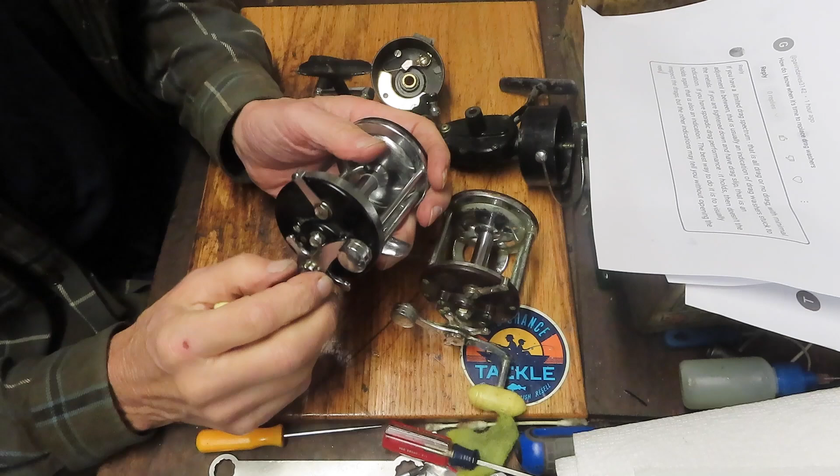The first comment I have is, well, is your drag slipping? If you're tied all the way down on your drag adjuster, whether it's the star adjuster or the drag tension knob up above, and you can still turn the spool, that means you don't have enough contact or pressure holding those drag washers firm. If they're not holding firm, you're going to have that slip. That's the first indication.

The second indication is a bit more interesting, and usually involves a reel that hasn't been serviced in quite some time. What happens is the grease that was put onto the drag washers - and there's a whole stack of them, metal and fabric washers inside the drag stack - dries out and bonds the washers to each other. That dried grease basically becomes an adhesive, bonding the two.

That freezes the whole drag stack. So instead of having drags that slip against each other on a cam-like basis, you have a single stack welded together. You'll have full drag if you tighten it all the way down, or free spool immediately, but there's no variation in the drag adjustment whatsoever. That tells you it's time to at least service the drags, and probably replace them if they've bonded together in the metals - they've likely become pitted, worn, and compressed.

So first is all drag and no drag, and of course if you've tightened your star adjuster or drag knob down tight, that's also an indication. Well, how do you also know?

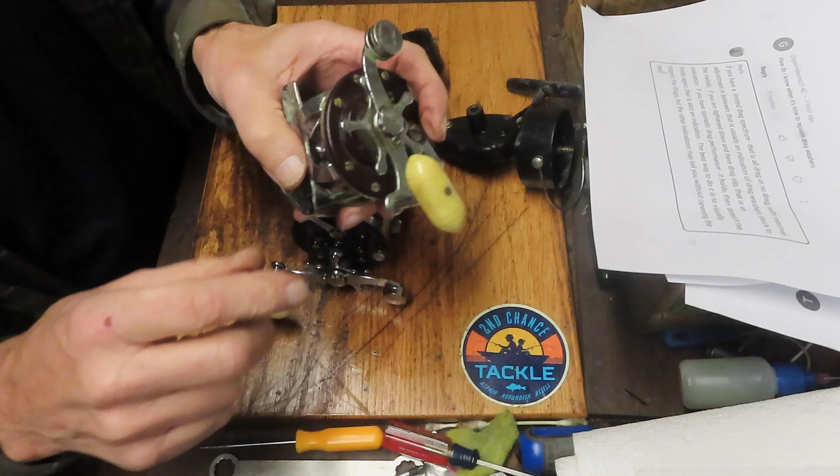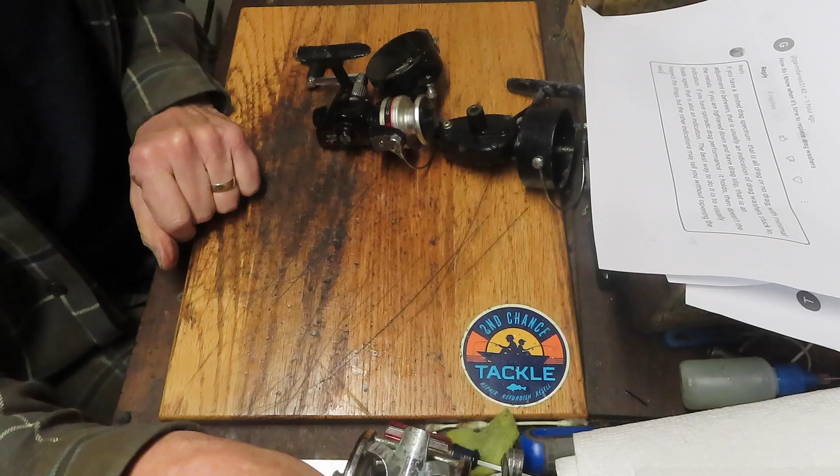If you have a reel, like this other Penn reel here, where that gap is pretty much gone, it's an indication that there's wear. So on a Penn reel particularly, if there's no gap here or a limited gap, that's telling you that you need new drag washers. So, a couple of different indications: all drag or no drag, drag slip, or the inability to have a drag when it's fully tightened down - all are signs you need to replace your drags.

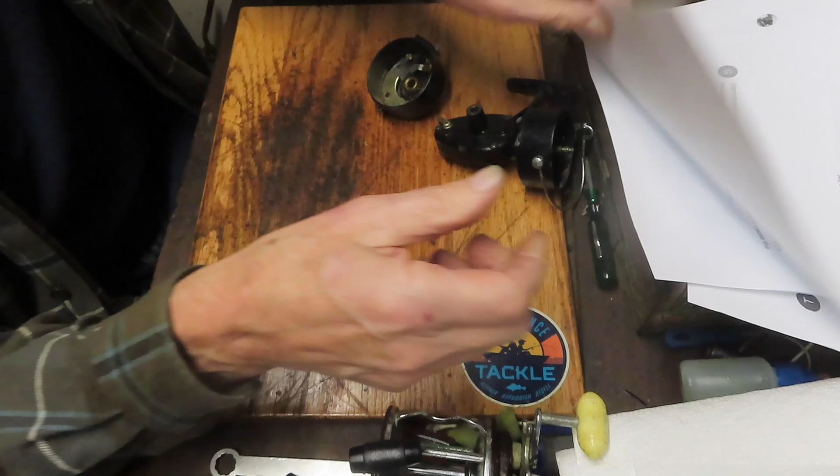Of course, the best thing to do, as I always say, is to service your fishing reel on a regular basis. I define regular as once a year - an annual servicing, either before you begin the season or at the end of it. I always recommend the end of the season, because that way it stays serviced over the downtime, and it'll be ready to fish when that first run comes again.

But when you do your service, check your drag washers, and at that time you'll know whether it needs to be serviced or not. Okay, another one comes in from 061.

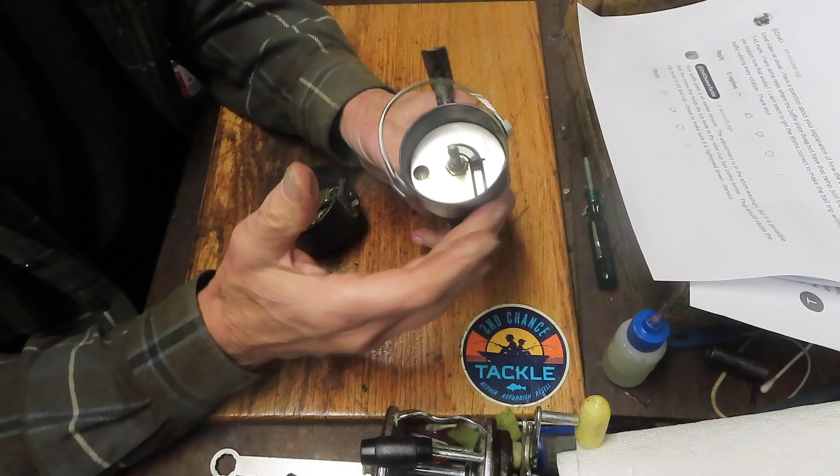He says, I have a Mitchell fishing reel with a baffle plate, and in my baffle plate I'm not getting a trip, and it's always rubbing. In this case, I'm turning it to... you're kind of hearing a little bit of a hit there, right? He says, I'm always getting a knock no matter how many shims I put up on top.

There are 3 or 4 shims that come from the factory setting on a Mitchell, in this case a 300. Those shims are used to raise and lower this baffle plate, and eventually you will get it where you just fire on the bail release, but you don't have that click. Well, he says no matter what shim setup I use, I still have the issue.

Well, that's interesting, that there could be other causes rather than just the shims. This is the most common of the other causes. So if you take your baffle plate off, and this one's kind of all dirty, it's been sitting in a parts pile, we'll get to that question in a minute. But sometimes this trip lever here comes loose.

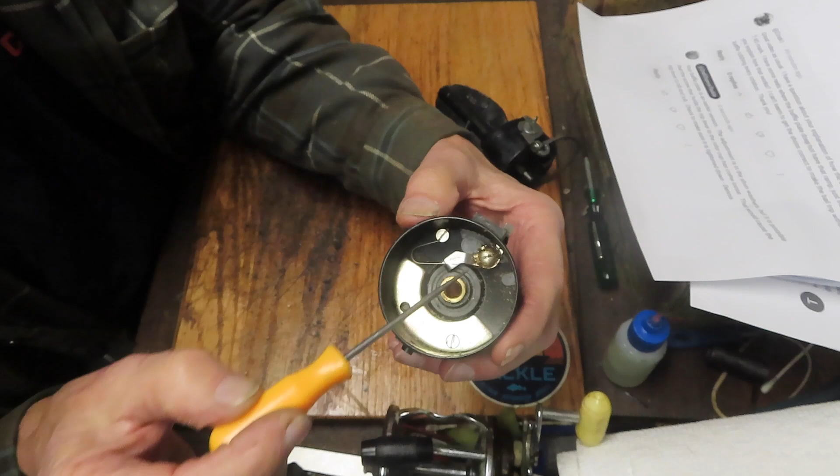And what happens is the screw that is holding that trip lever in place walks itself back up, and instead of being flat and holding tight to the bottom, it becomes canted. It starts kind of going up this way, and when it comes up that way, that's what's connecting with the baffle plate, and that's what's giving you a click.

Now, I didn't take it off in this situation to show you, but I guess the lesson in this one is don't think it's just one thing. Expand beyond your thinking and look for other possible causes. If you've exhausted the number of shims, maybe you've got something like this happening where that screw has come loose, that lever has come up, and that's what's actually doing the contact.

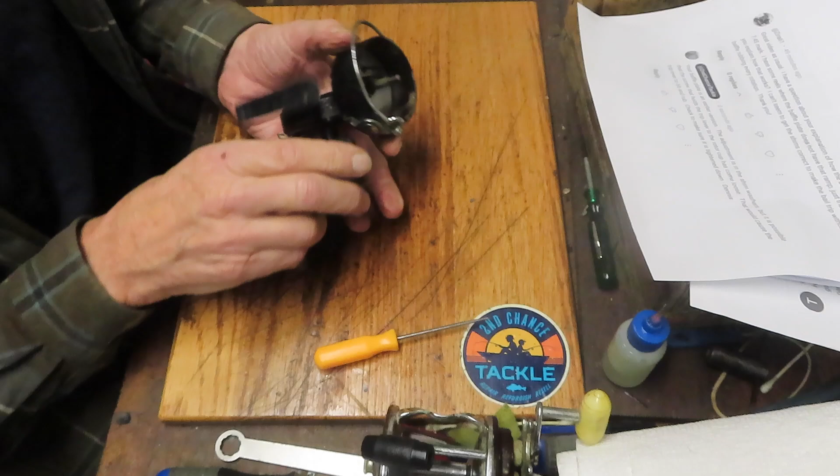Hope you kind of find that one helpful. Third one is kind of a curiosity. It says, where do you learn all of this stuff about fishing reels?

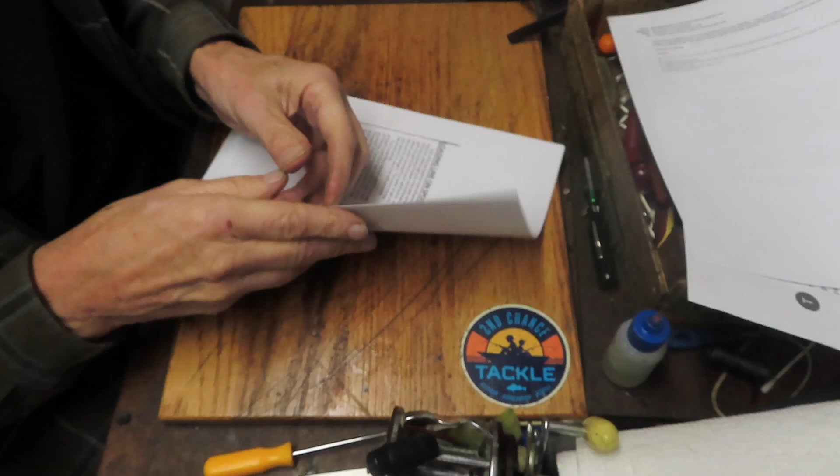Well, I go to the manuals an awful lot, and a question came up when I was saying, do the annual service, is it recommended? Right? Well, I was just on with another question. Maybe someone out there has the answer to this one. The question that came into the forum was, what does the letter Z on the 700Z series of Penn reels stand for?

Well, I went to the Penn manual. I couldn't find the answer. It just always referred to it as Z series, but it never said why is it the Z, why was that selected? So I don't know, but if somebody knows the answer to that one, please share it with us. We're always looking for help and understanding.

So if you know why the Z designation is on, say, the 716Z, which is a video that I just posted, well, let us know.

So in that manual as well, I found 2 things that are very interesting, and that kind of backs up some of the things I say. I try to tell you to do your service on a regular or an annual basis, flush your reels after use, and keep them lubricated for best results.

Well, here's the right out of the Penn Z series manual. It says this Z series is a spinning reel of quality manufactured for durability. It's a precision instrument that requires care to ensure top performance. It says after each fishing trip, the reel should be cleaned. If you have been fishing in salt water, wipe the reel or wash the reel with fresh water, preferably warm, to remove any accumulated salt.

Well, right out of the book there. I generally tell you to submerge that in a pail of water. That's the best thing. Don't use dish detergent. Dish detergent, by its nature, is a degreaser, so it will get rid of the oils and greases in there.

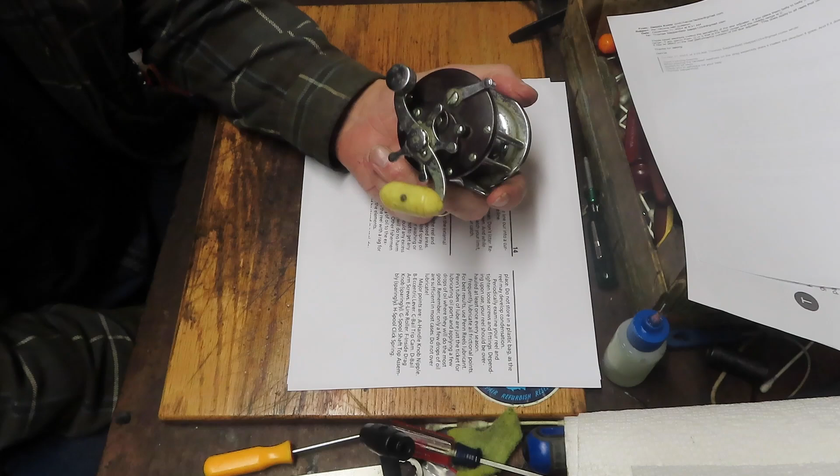It also tells you that when you're servicing your fishing reel, in between services, every now and then check to make sure all of your screws on the reel are tightened, and check the fittings to make sure everything is bracketed down. We've always talked about boat vibration and how the rattle will loosen screws, so do that.

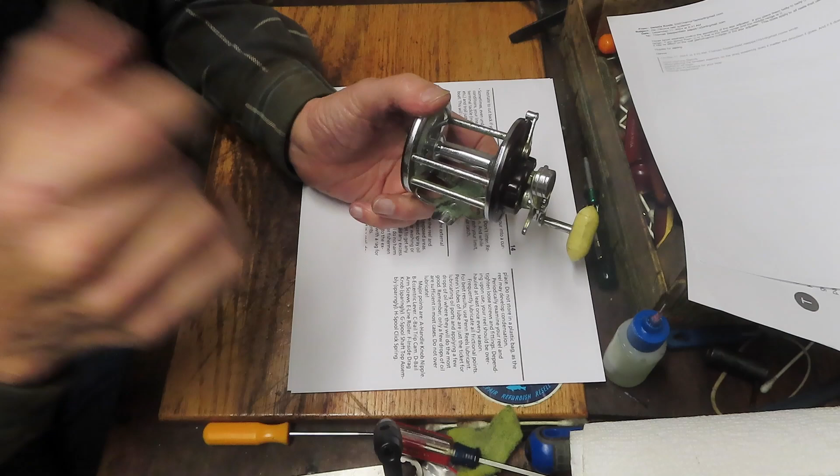And then it tells you to frequently lubricate all of the friction points. For best results, use Penn's Reels lubricant and oil products. Well, I use those, you see that all the time, but I really don't care which one you use. Just make sure that you use a reel oil and a fishing reel grease. Those are designed for marine usage, and while other products may seem like they do a good job, you use them at your own risk.

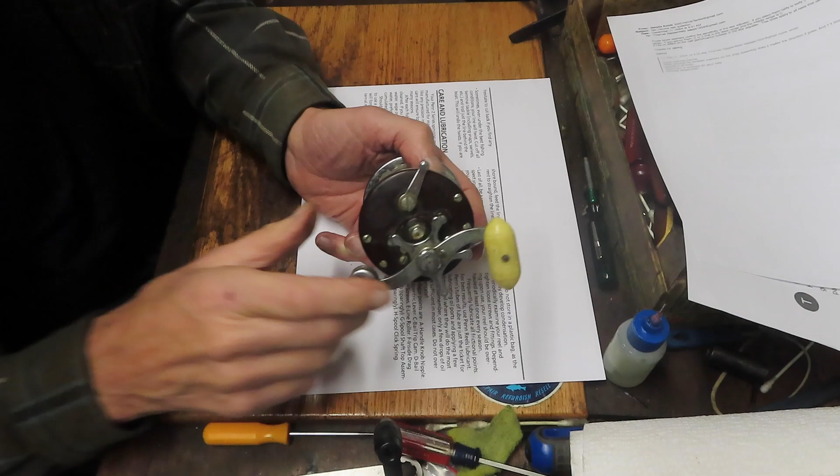It's your reel, do whatever you like with it. But for the most part, the friction points - they tell you to put a drop of oil into the gear shaft. That gear shaft is on the other side of that screw, the hole here. The oil is going to come into that and keep the stem lubricated as that shaft moves around.

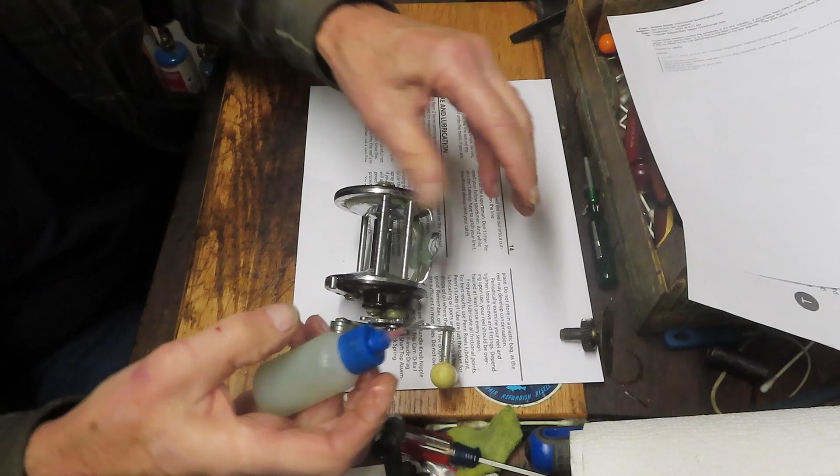They'll also tell you that you can put a drop of oil onto your eccentric lever. You can remove your bearing or use the oil port here to oil that bearing, and that'll keep your reel going in between the key services.

So how do you learn about it? Go read the manuals. That's probably the easiest thing to do in terms of getting that right.

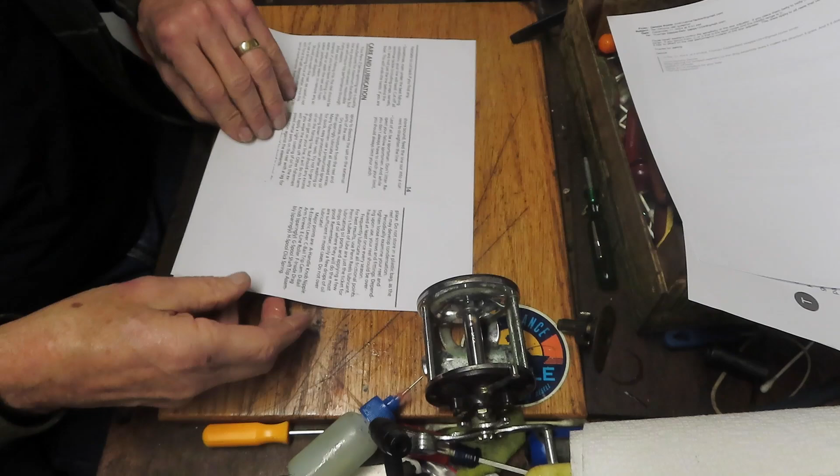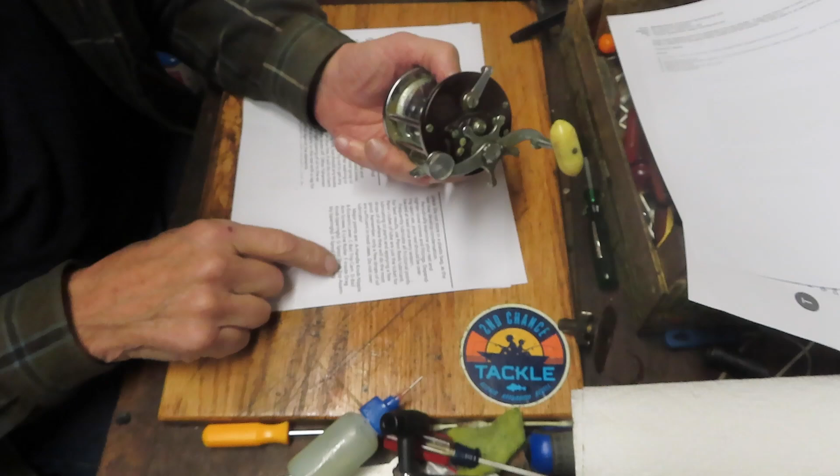It says the major points are your handle knob - I missed that one - your handle knob, the eccentric lever, the bail trip cam, the line roller on a freshwater or spinning reel, the inside drag knob - use that sparingly, it says inside here - and the spool click spring.

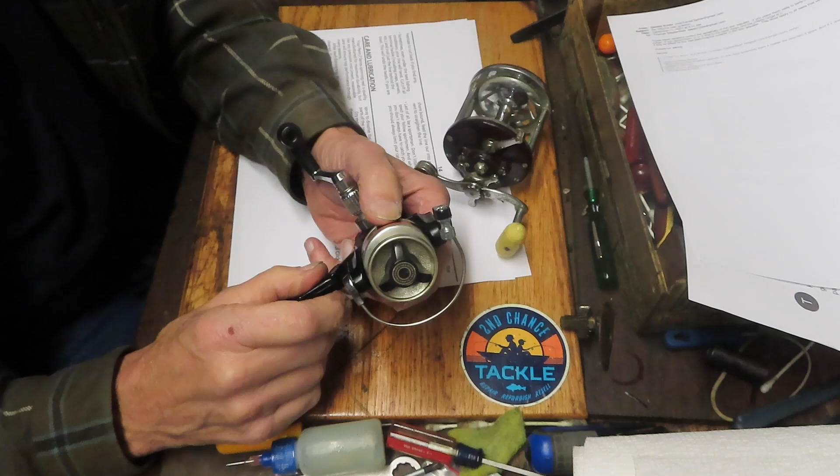Of course this manual is from the spinning reel, but if you take this off, you can get to the shaft underneath right here. You can put a drop of oil onto the shaft. Okay, hope you found that one useful.

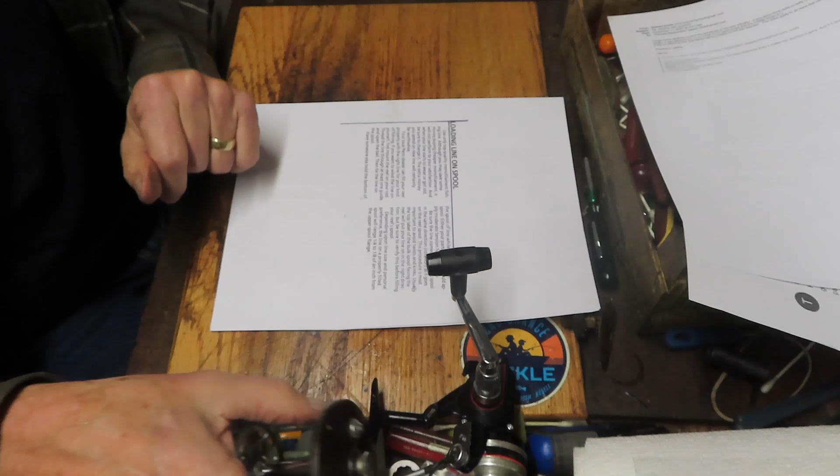Also, I've mentioned before there is a proper way to put line onto a reel, particularly with a spinning reel. If you're using a conventional reel, the best way to put the line onto the reel is just to hold the reel with an arbor in between it.

We've all done that with line, right? Just spool it up, making sure that as it's coming off the spool, it's going in the same direction. So if my reel is turning this way, I want the line turned so it's coming out the bottom of the reel, the spool. That'll ensure it collects properly and doesn't bind or twist. The more interesting one is always the spinning reels, because you will get knots and tangle-ups if you don't do that properly.

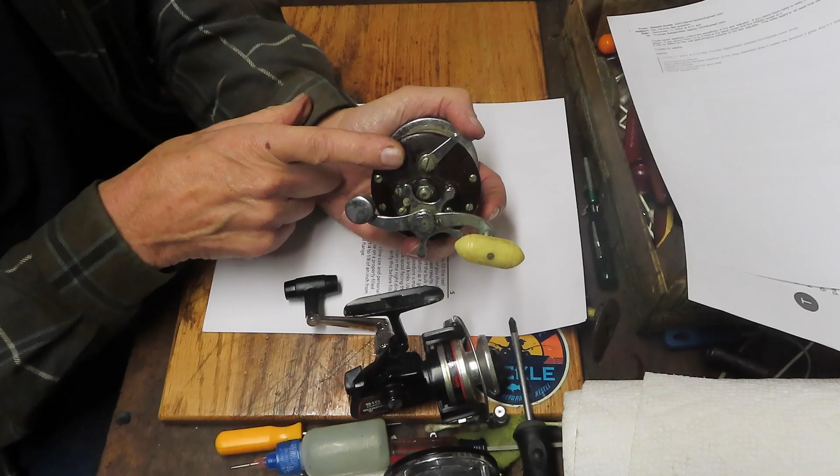This one, we've mentioned before - it tells you to have a person hold the line spool like that. Typically the label of the line will be in the right direction. Hold the back of it and unspool it out the front of the spool. What you need to check for is that the line orientation in the collection and on the spool are identical. So in this case, the line is rolling in this direction - you want to check that your spool is going to be releasing the line in that direction.

So I hope those questions have been helpful. I get plenty of questions on a regular basis, and we'll continue to answer those in these episodes.